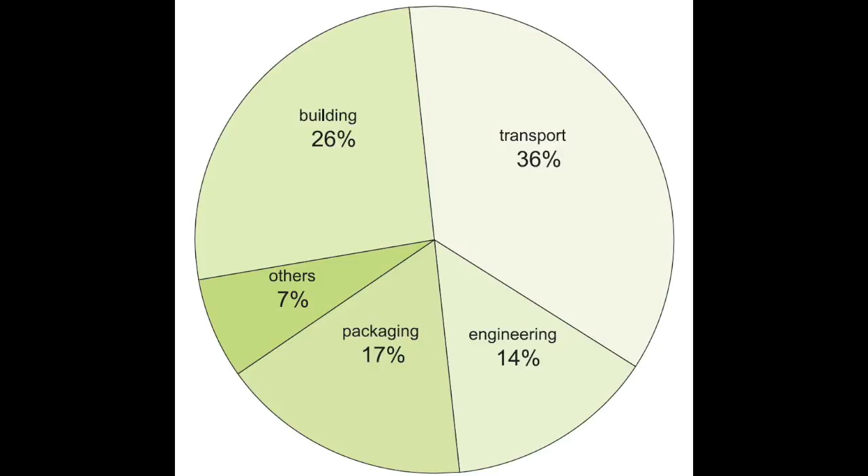Elemental aluminium is the most abundant metal in Earth's crust, and makes up approximately 8% of the total crust mass. In civil and construction applications, an aluminium alloy is most commonly used, and the type of alloy varies depending on the requirements of the structure.

Aluminium has been in use since the mid-19th century, however production prices have drastically decreased over time. This fact, coupled with the sheer abundance of the metal, means that aluminium is the second highest used metal in the construction industry, only falling second to iron.

The Australian aluminium mining industry is one of the largest in the world and is a $50 billion industry. Australia is also the world leader in the production of bauxite, an ore that aluminium can be obtained from. This is the most common method of obtaining pure aluminium.

Aluminium has been used for many centuries and even dates back to the ancient Greeks and Romans, who used aluminium salts on wounds. However, aluminium as we know it today has only been around for about a century. Bauxite, an aluminium-rich material, was first discovered in 1821 in France, and for many years several scientists attempted to purify this into aluminium. Aluminium was first isolated in its pure form by Frederick Wohler in 1827, who is accredited with its discovery in its pure form.

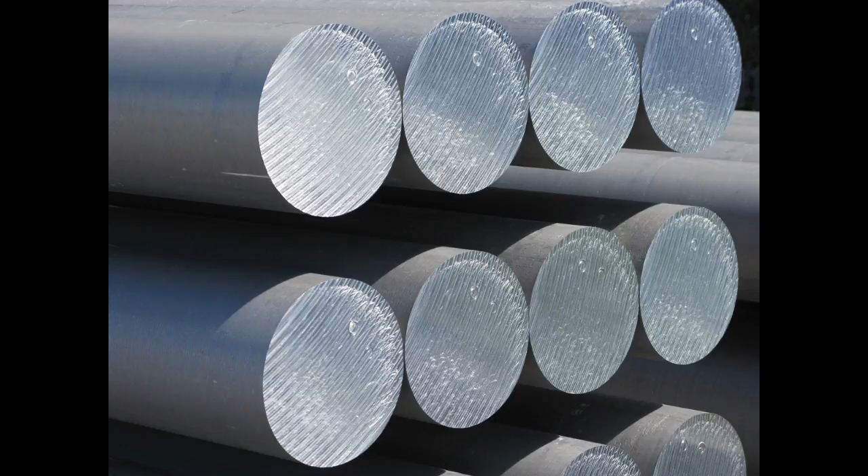1854 was the first year that commercial quantities of aluminium could be produced. This was achieved by Henry St. Clair Deville, who substituted several of the expensive ingredients of the purification process with relatively inexpensive chemicals. During the next 30-odd years, Deville's process produced over 200 tons of aluminium that was used in ornamental items.

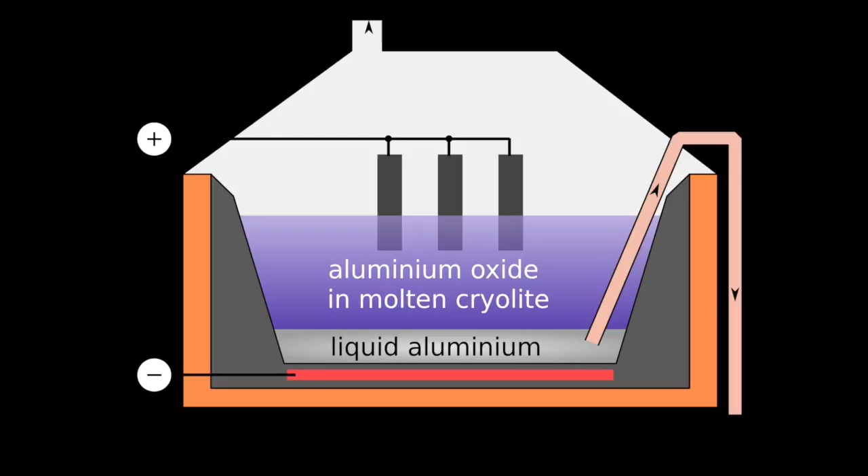The electrolytic process involves passing electricity through bauxite to extract aluminium and produces a much higher yield compared to Deville's process. This was the dawn of today's aluminium industry, and in its first year alone, this process produced approximately 45 tons of aluminium. The first use of aluminium in any structure was the Washington Monument in 1884.

The government at the time decided to use a large aluminium cast as a capstone. Since this revolutionary decision, many statues began being cast in aluminium, and the civil industry discovered the potential in this new material. Aluminium use skyrocketed throughout the 20th century in just about all industries, and was widely used as a lightweight alternative to steel. Physical properties of aluminium.

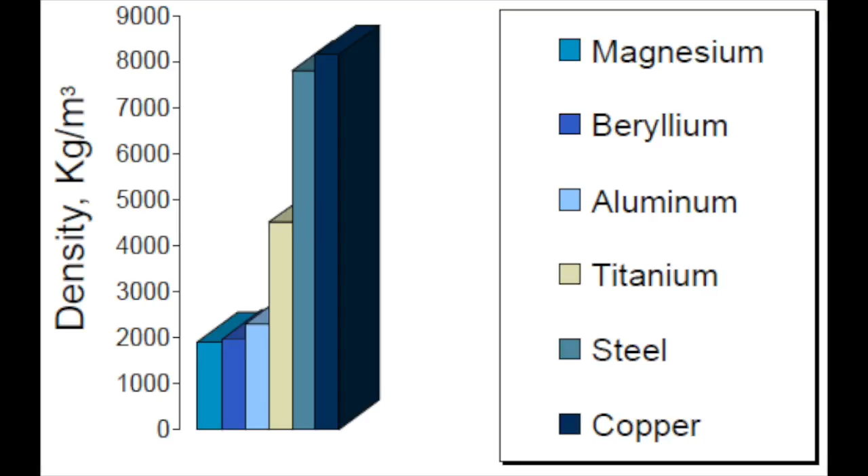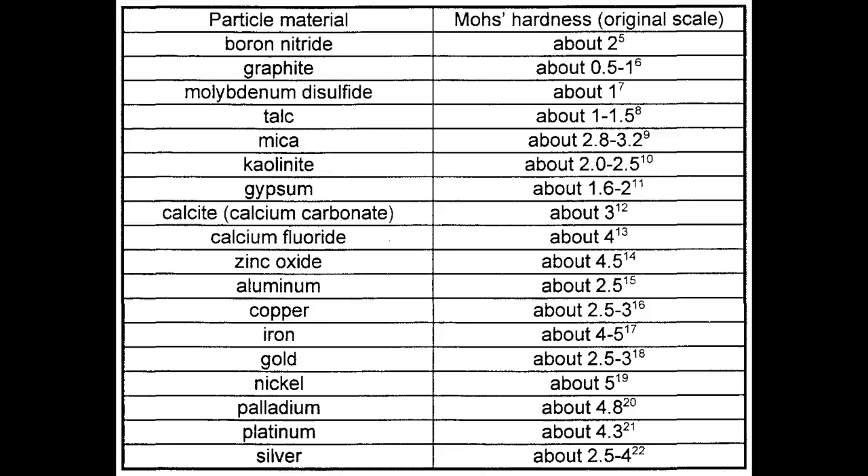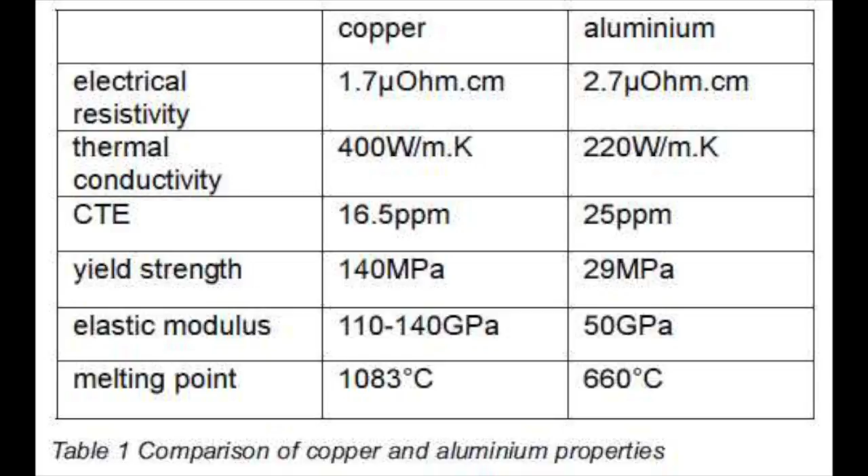Typically, aluminium is the lightest of all ordinary metals, with a density of around 2,700 kilos per meter cubed. Ultimate tensile strength ranging from 40 to 600 MPa dependent on alloy materials. Hardness on the Mohs scale ranges from 2.5 to 3. Young's modulus of the material is around 70 GPa. Characteristically, aluminium has high ductility and malleability, high corrosive resistance, and high thermal and electrical conductivity.

Alloys are usually classed into a series of the main alloying material, with pure aluminium being a 1 series, copper being a 2 series, manganese a 3 series, silicon a 4 series, magnesium 5 series, magnesium and silicon 6 series, zinc 7 series, lithium 8 series. In civil and structural applications, you usually see 5 and 6 series, 5 being sheeting components like facades and whatnot, and 6 series a bit stronger with structural components.

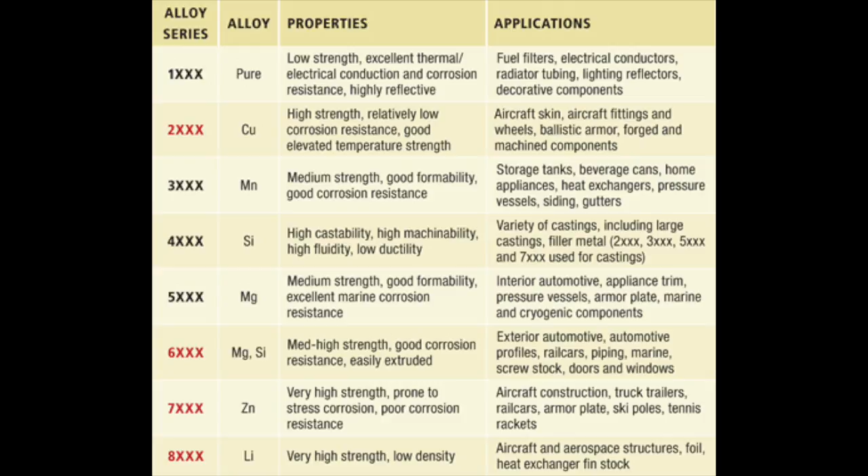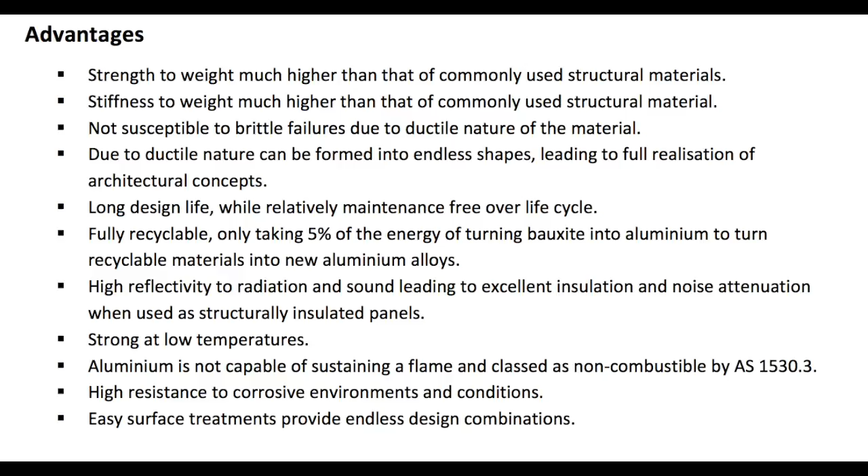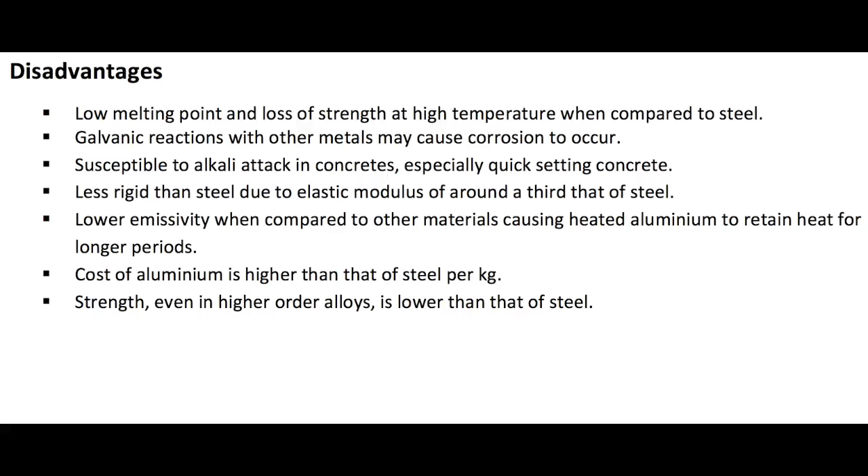Advantages of aluminium are a high strength to weight, long design life, corrosive resistance, it's fully recyclable, can be formed into endless shapes and designs, and it's very strong at cryogenic temperatures as opposed to steels. Disadvantages are its loss of strength at high temperatures, it's susceptible to galvanic reactions and alkali attacks, its high cost comparatively, as well as strength is still low in comparison to steel.

Almost all modern-day manufacturing of aluminium is a four-stage process beginning with the mining of the ore bauxite. Secondly, the ore is refined into alumina using a method called the Bayer process. Thirdly, the alumina is smelted into aluminium via the Hall-Héroult process. Finally, once the aluminium is produced, a variety of alloying, casting, and treatment methods can be applied to turn the metal into an appropriate form for storage, transportation, or use.

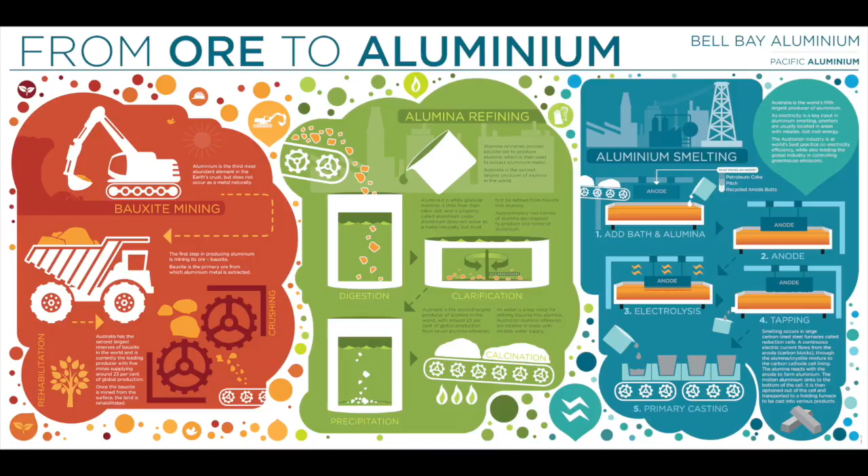Relevant Australian standards, for example AS 2848.1, for composition and designations, must be applied at all steps to meet industry requirements. To extract the bauxite ore, typical surface mining methods are applied, and the extracted ore transported to refineries to begin the Bayer process. At these refineries, the Bayer process uses thermochemical digestion to separate the ore constituents and obtain alumina.

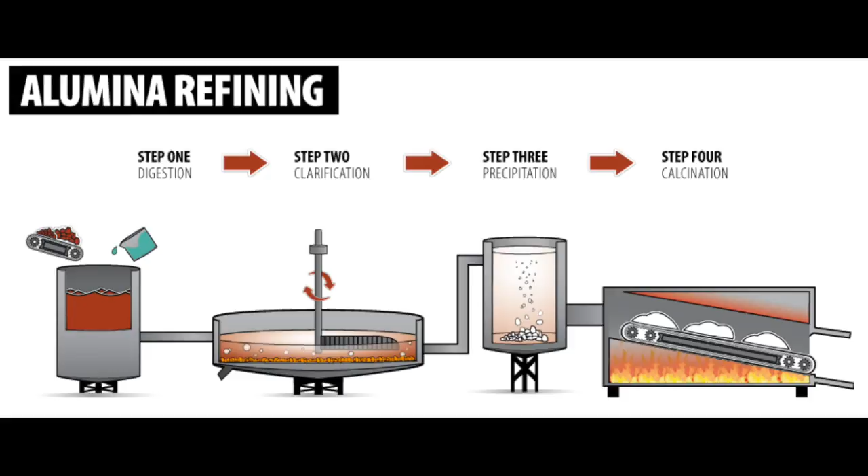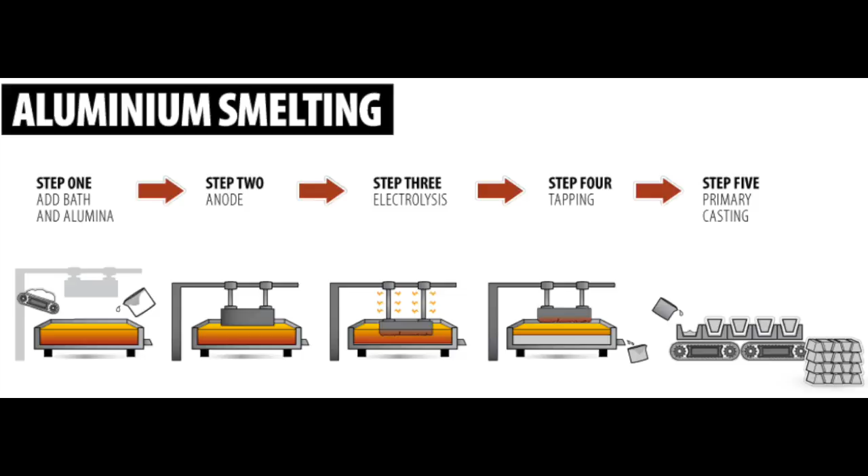The third step of smelting, via the Hall-Héroult process, is extremely and sometimes prohibitively costly, as it runs an enormous amount of electric current through a molten mixture of cryolite, alumina, and aluminium fluoride to obtain the liquid aluminium. As a result of the cost, this stage of the process is quite often undertaken in areas with hydroelectric plants to make it financially viable.

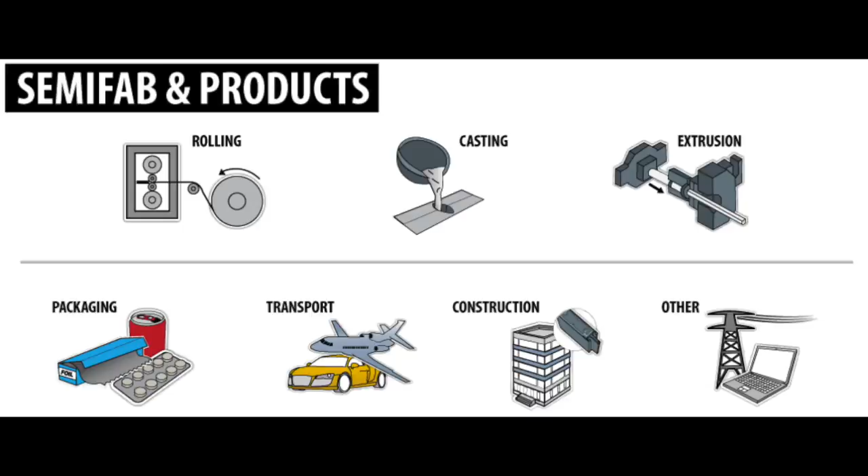Finally, the smelted aluminium can be alloyed with other materials to produce the desired qualities, cast into desired shapes, and have treatments such as annealing, quenching, precipitation hardening, extrusion, and rolling to produce desired material qualities. There are three main methods for testing the material properties of aluminium. These are tensile tests, bend tests, and cupping.

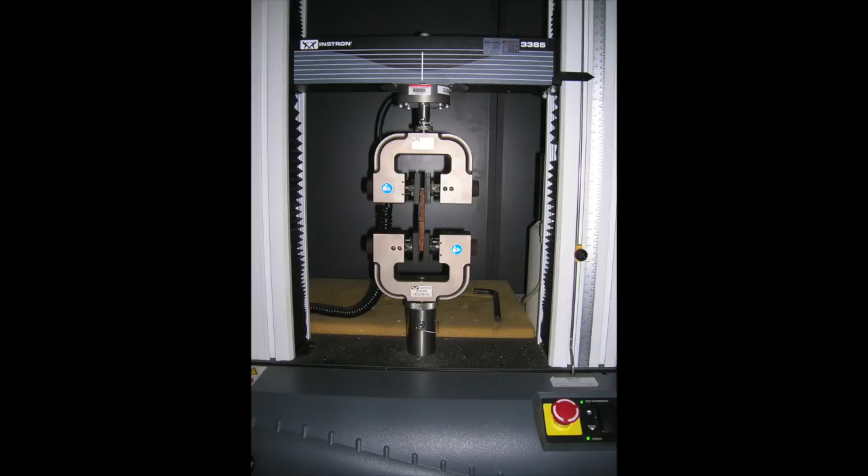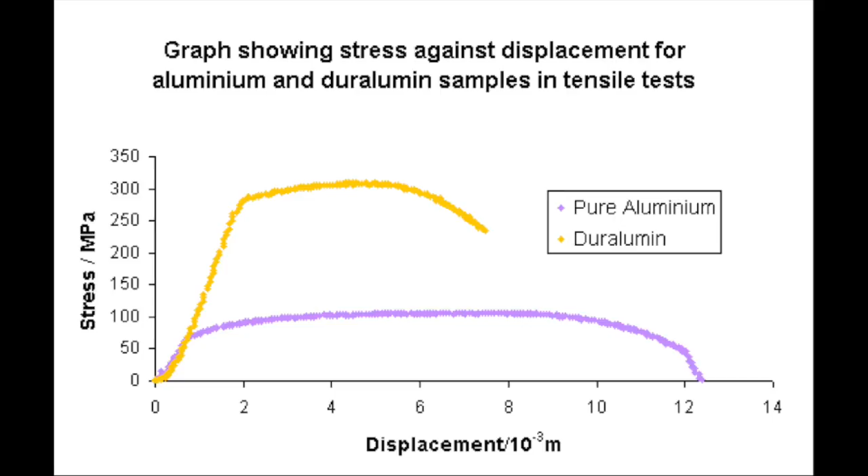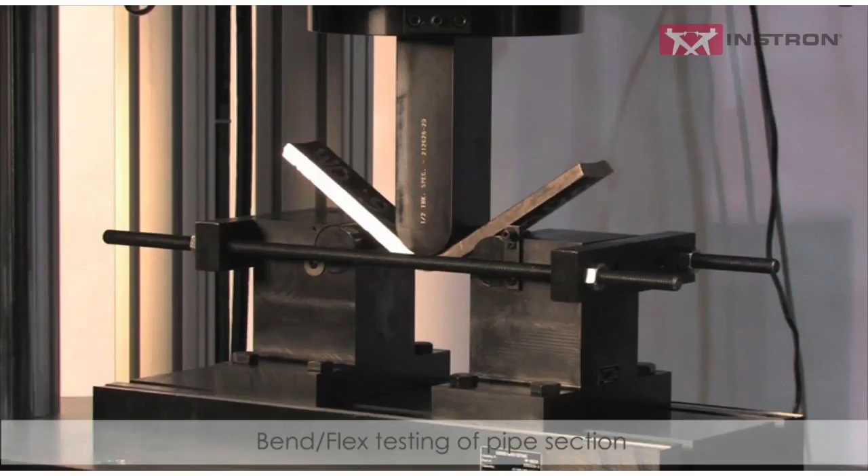Tensile tests are governed by AS 1391 and use controlled and increasing tensile loading until failure to determine ultimate tensile strength, maximum elongation, reduction of area, Young's modulus, Poisson's ratio, yield strength, and strain hardening. Bend tests must adhere to AS 2505.1 to AS 2505.6 and use a variety of bending methods to determine modulus of elasticity in bending, flexural stress, flexural strain, and flexural stress-strain response.

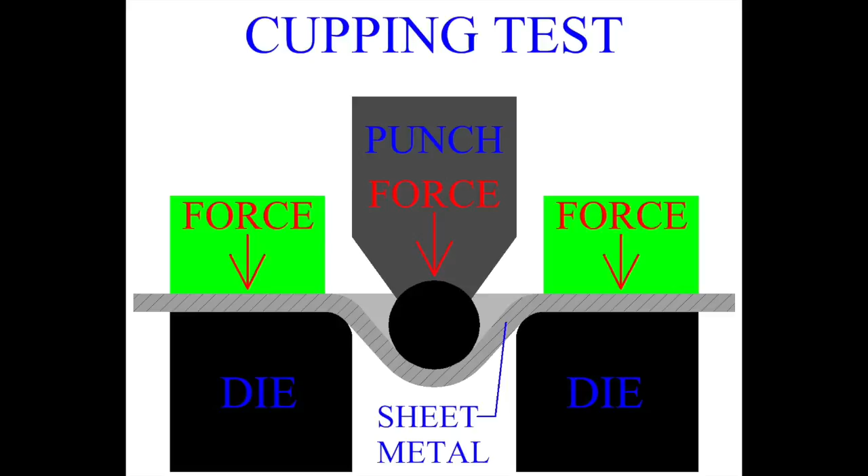For cupping tests, there are no set Australian standards, although their use is approved of by standards, with the involved parties agreeing on the parameters. Cupping tests determine a material's ability to undergo plastic deformation and stretching by forming an indentation until cracking of a material sheet or strip occurs.

In 2011, approximately 17,600 Australians were employed in alumina and aluminium production and bauxite extraction. These projects can have a positive economical impact on the community, generating local employment and government revenue. The production of aluminium requires a large amount of energy. To produce 1 kilo of aluminium requires on average 155 megajoules of electrical energy and emits 8.24 kilograms of carbon

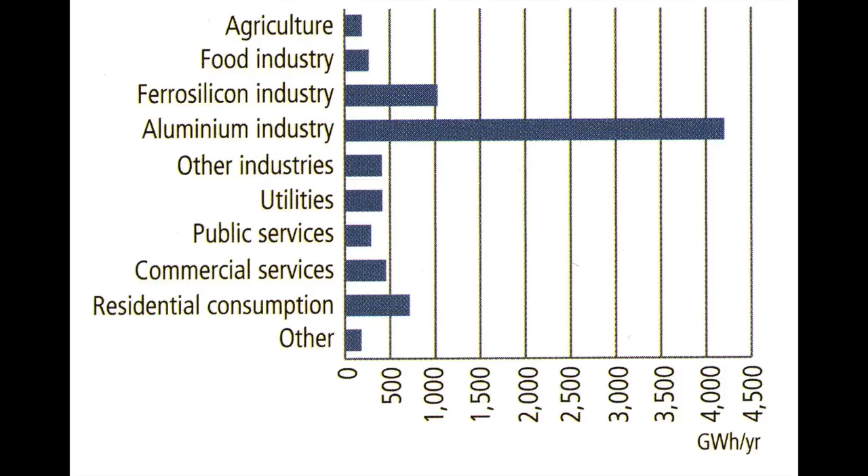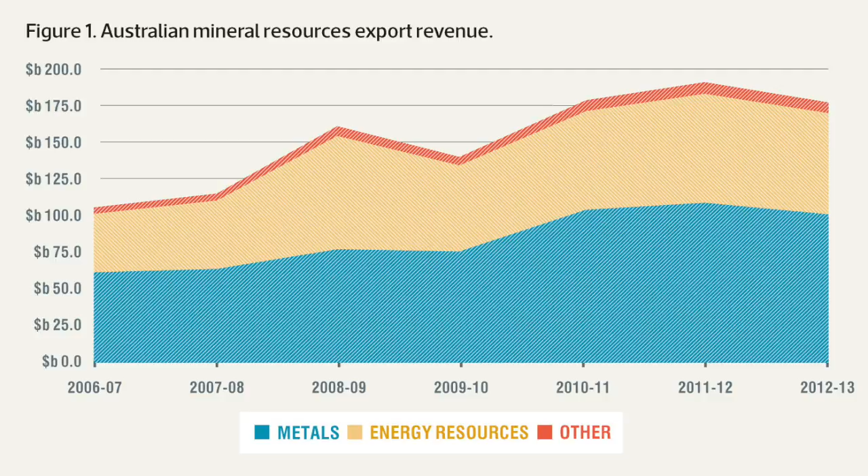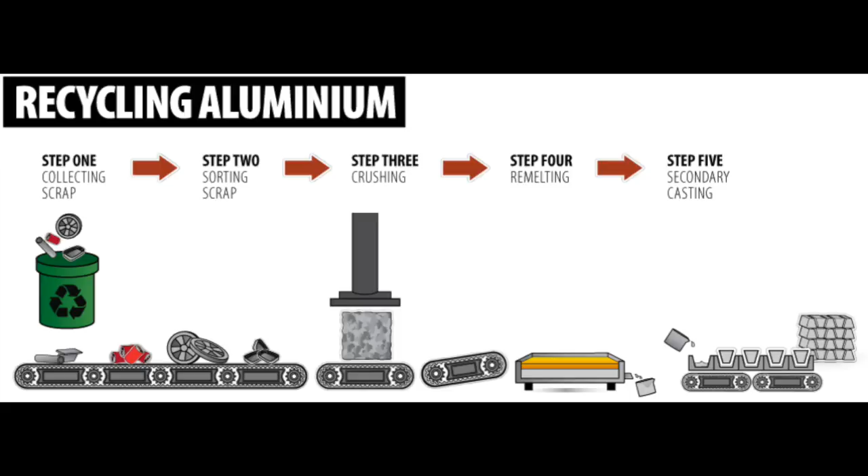Aluminium is 100% recyclable, and when recycled there is no loss in material properties. The recycling process benefits the environment, economy and community. It preserves natural resources, generates jobs and saves time, money and energy. The recycling process uses only 5% of the energy requirement and emits only 5% of the greenhouse gases compared to the manufacturing process. Recycling aluminium also decreases mining, protecting local flora and fauna, and decreases landfill.

Aluminium is a beneficial material in the construction industry as it guarantees long-term structural integrity with lifetime cost savings. Unlike steel, aluminium is resistant to rust and corrosion, making it a greater material in terms of endurance and overall

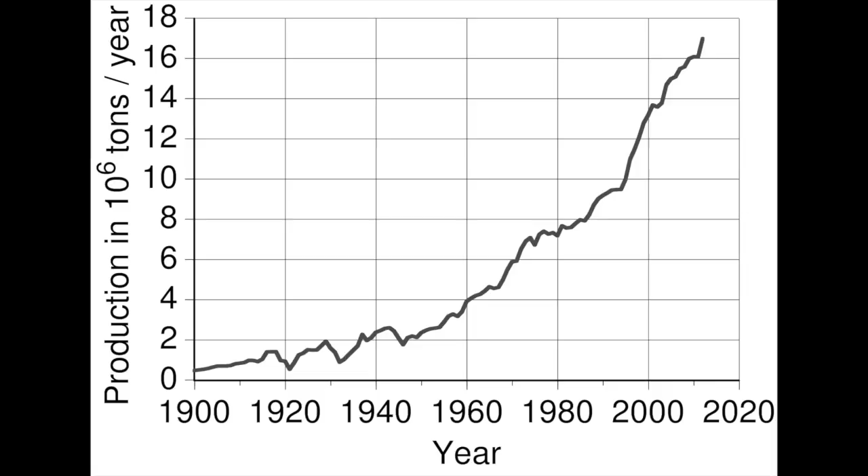sustainability. When aluminium was first introduced in the construction industry in the 1920s, its applications were primarily oriented around decorations and artistic structures. It was not until 1930 when major structures and components in the Empire State Building were the first to be built with aluminium, and ever since, the use of aluminium in the construction industry has been a

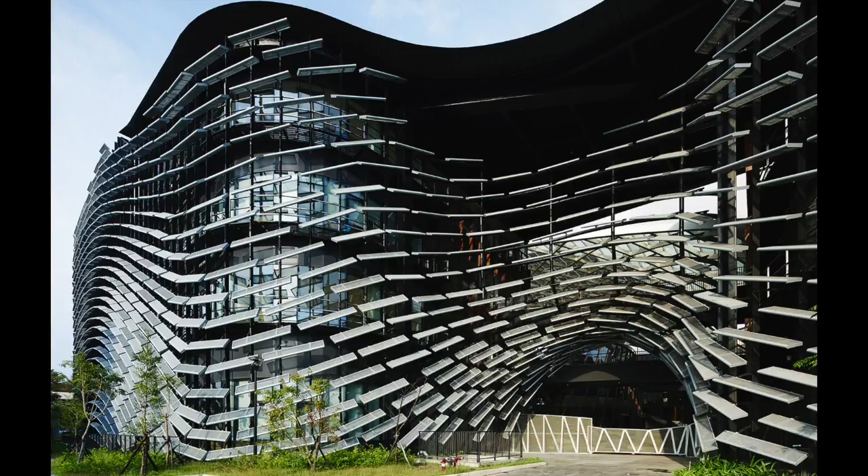continual major influence. In the modern age, buildings and civil construction isn't only limited to erecting structures functionally and ensuring they're safe. Consideration for aesthetic designs and economical criteria, long-term sustainability and recyclability are also taken into account and are a crucial aspect within construction.

With the introduction of aluminium, many modern architectural concepts and designs can be realized and developed. These designs range from solar panels, facades, roofs and other exterior members to window frames, blinds, doors, and interior decoration and designs, as well as other functional aspects. Alongside the boom of modern architecture, aluminium is also being used to restore historical buildings to preserve their glory.

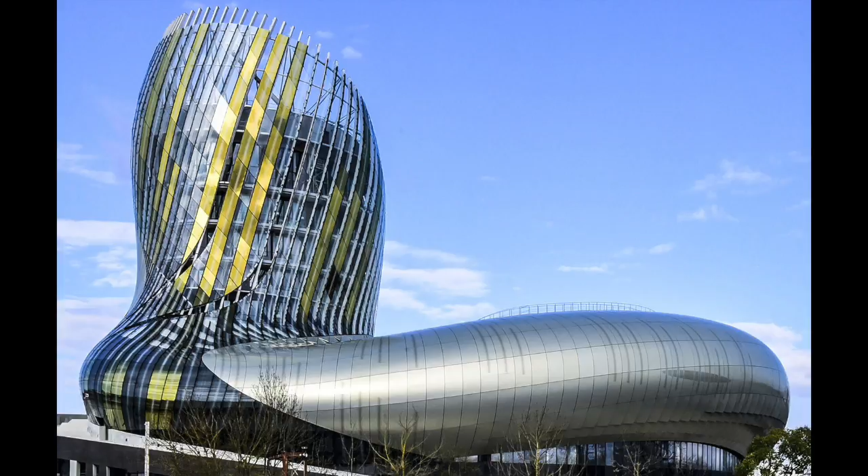Although traditionally iron and steel have been the primary materials used in construction, the rapid boom and modernization of design and architecture has forced engineers to consider aluminium as an alternative for construction applications. Although aluminium is generally more expensive than steel, it could be more cost-effective in the long term due to its low maintenance rate and zero cost for galvanizing and coating.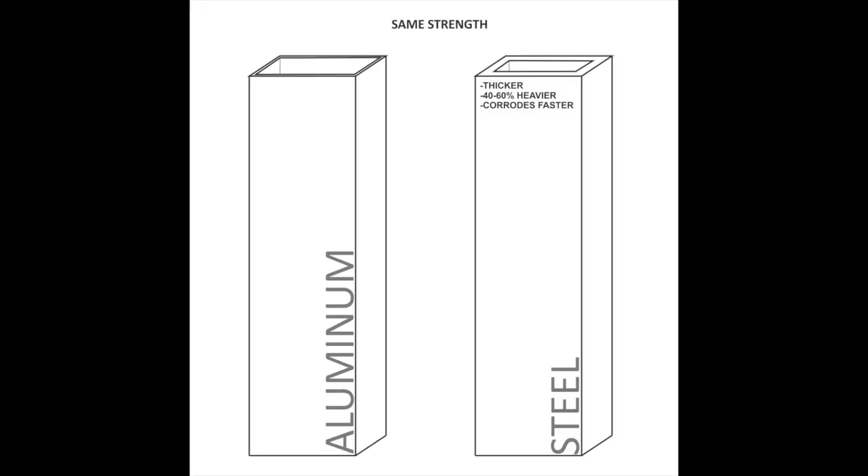Due to its minimal weight, it can be stored quickly and conveniently while being environmentally friendly, and its high strength and durability and its aesthetically pleasing design allow for a more contemporary design and style with increased safety. Over time, significant advancements in technology make their way into the construction industry based on extensive research, experimentation, and development. It has led to numerous considerable improvements.

With technology that allows for the new understanding of the current properties and limitations of aluminium, along with the new understanding of other metals, metallurgy researchers deduced that aluminium has the ability to be alloyed with various other elements to drastically enhance its physical and mechanical properties. Some common alloys are copper, lithium, magnesium, manganese, silicon, and zinc.

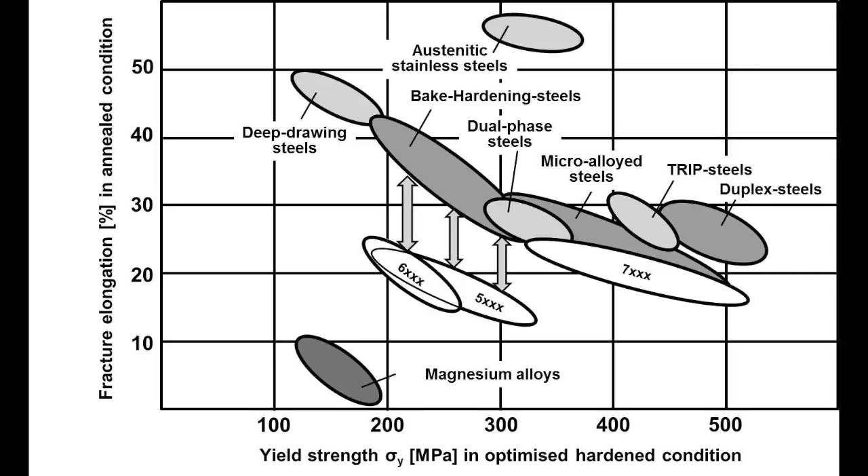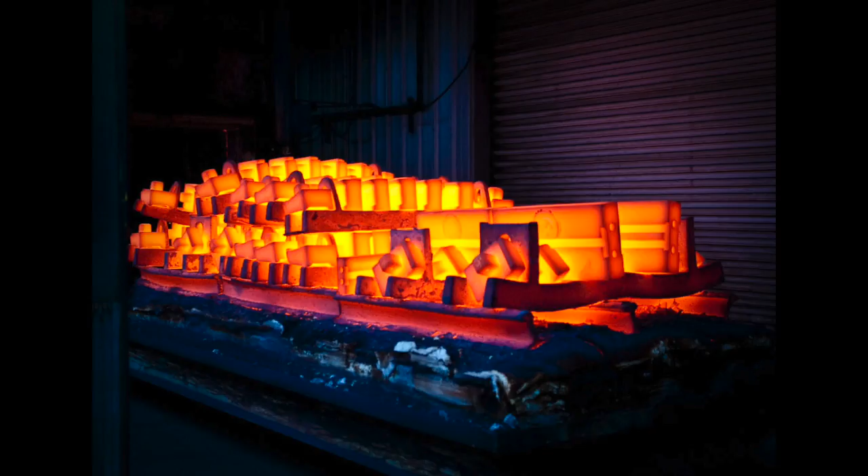New current technologies utilizing different combinations of metals allow the properties of aluminium to be tailored to different advantages that are well suited for specific purposes. Alongside alloying, innovation in metalworking processes allows aluminium and its alloys to be worked differently. Heat treatment is a process of metalworking that allows the altering, usually physical but sometimes chemical, of the property of a material. This type of innovation is another way to drastically change the physical and mechanical properties of aluminium to

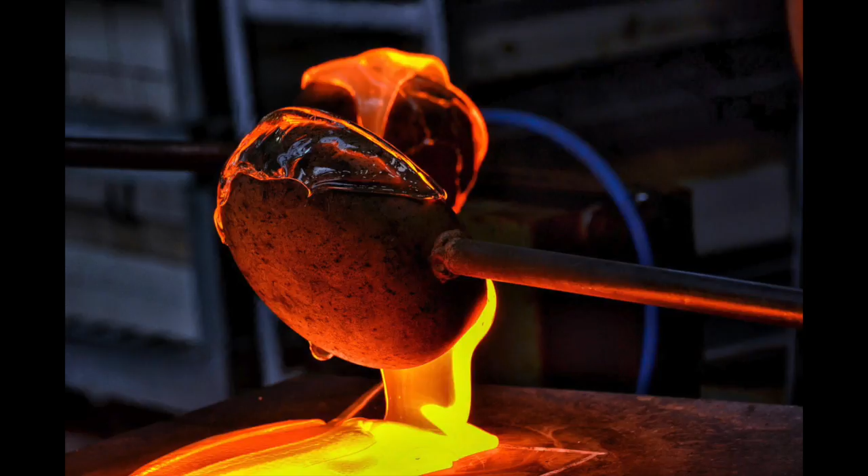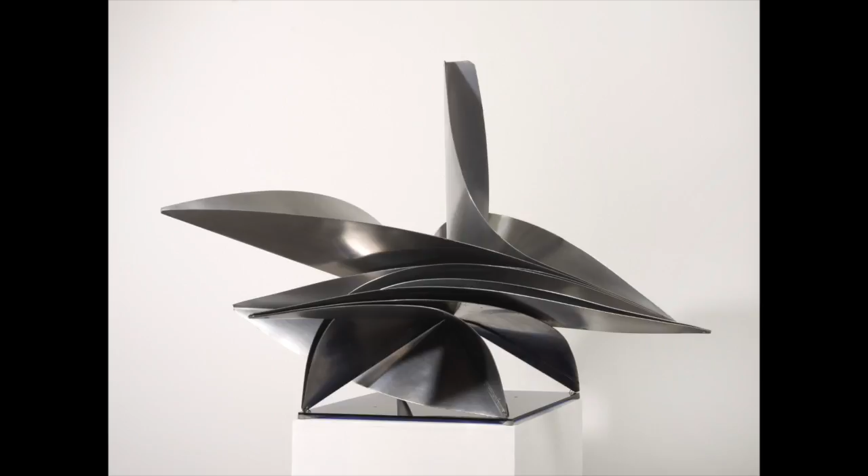create advantages. Casting is another innovative metalworking technique, which involves the process of pouring molten metal into various shaped molds that contain a cavity of the desired shape, then cooled at different rates, allowing it to solidify. With this technology, aluminium decoration and other functional aspects can be achieved that were not previously possible. These three innovations have allowed aluminium to further enhance its physical and mechanical properties that were previously not possible.

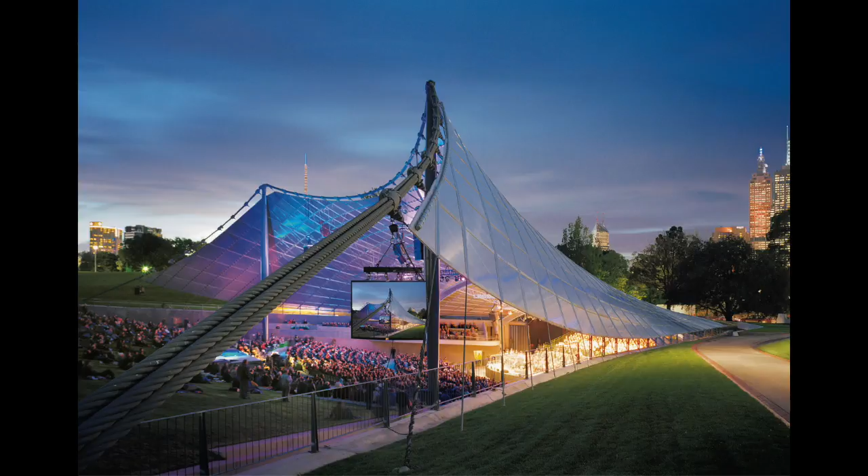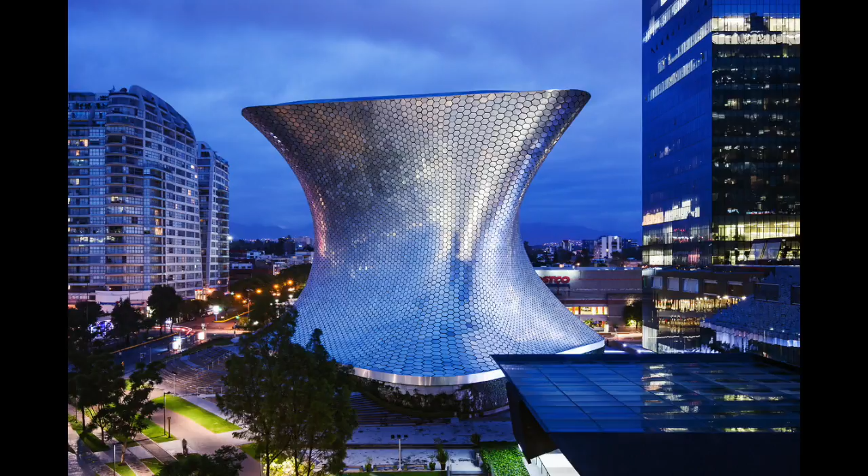Now, understanding all of these important aspects of aluminium and how it has undergone such drastic changes since its introduction about a century ago, new questions arise. Will technological innovation continue to improve the use of aluminium? And where will aluminium take us now? The future is here.